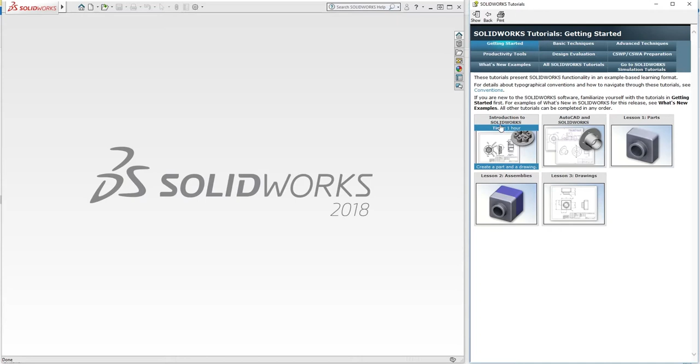Please click on the Home tab and click on Welcome to Solidworks. You can find the Learn tab over here, and there are a lot of introductions, tutorials and guidance. Please click on tutorial and you will find the first tutorial about the introduction to SolidWorks over here. That's what we are going to do in this video tutorial.

If you click on it, you will find the instructions step by step very clearly over here. And if you move your mouse over an icon and click on it, it will show where the icon is, so you don't have to find them. The instruction is very clear. Please follow until the end to draw the pressure plate.

Now let's do it step by step. In the first step, please click on Create a new part. In the Feature tab, click on Extruded Base and select the top plane to draw on it.

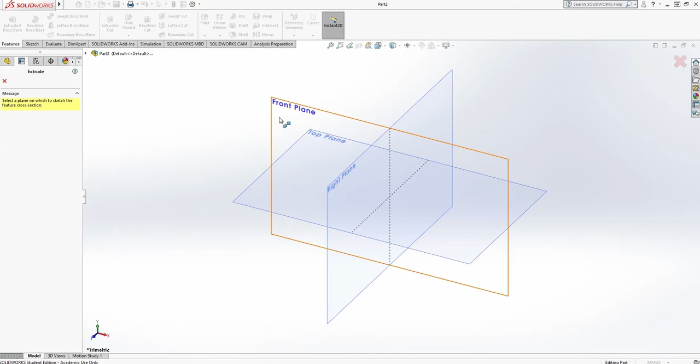When you are in top plane, click on Circle to draw a circle from the origin, and set the dimensions of this circle to be 128 millimeters. You can change the unit by clicking on Option, then Document Properties, then Units.

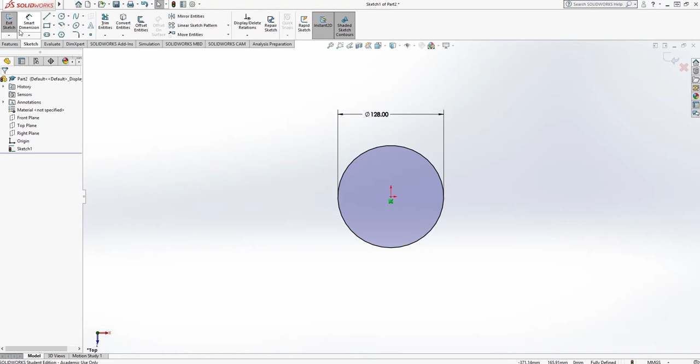After finishing, click the green tick and exit the sketch. Now you can enter the height of your base. You also can change the direction that you want to extrude. Please select the direction that goes upward.

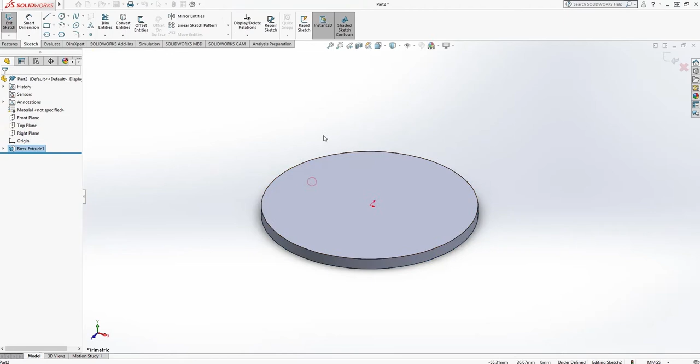In the next step, we are going to extrude a wall on the top surface. So change the view to the top view, and in the extrude base, draw a circle. Please set the circle dimension to be 75 millimeters.

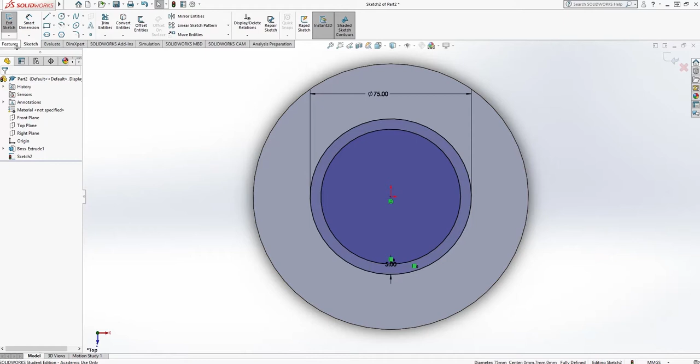In the next step, we are going to offset it. Click Offset Entities and select the direction to be inward, and enter the offset distance should be 5 millimeters. When you exit the sketch, you can enter the height of the wall you just drew.

To have a better perspective, you can change the view to be isometric.

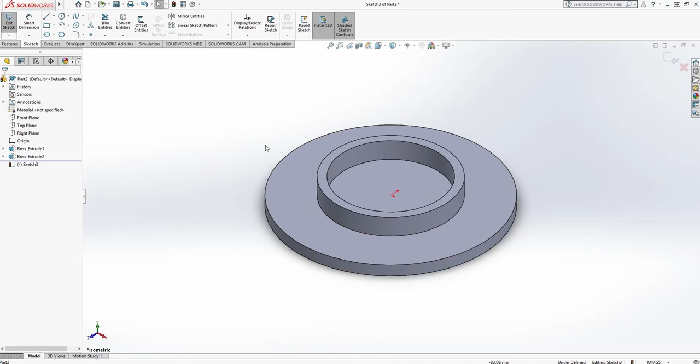In the next step, we are going to create a hole at the middle of the base. So we use Extruded Cut and click on the top surface of the base, and draw a circle at the middle. Please set the dimension of the circle to be 25.

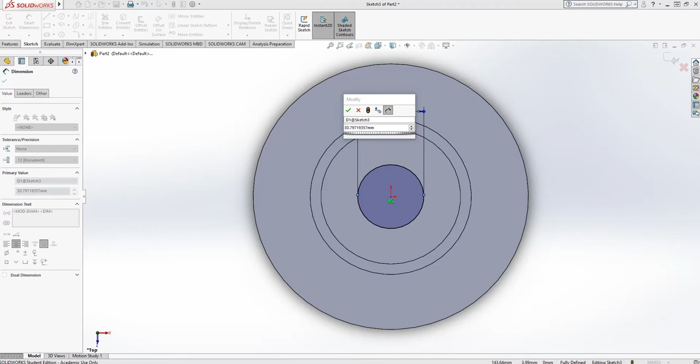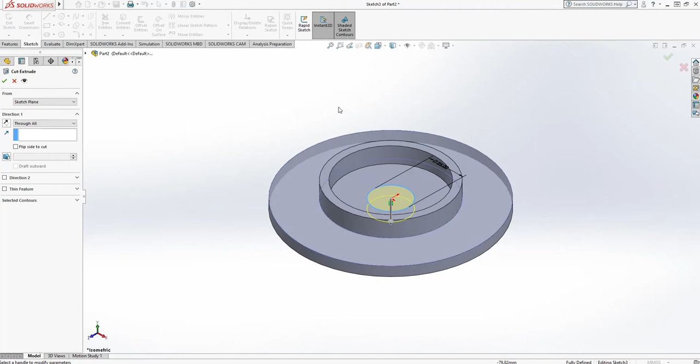When you exit the sketch, you can select to cut through all, that means you cut through everything. Approve it. Now we are going to do the fillet to smooth the edge.

Enter the fillet radius to be 2 millimeters, and approve it.

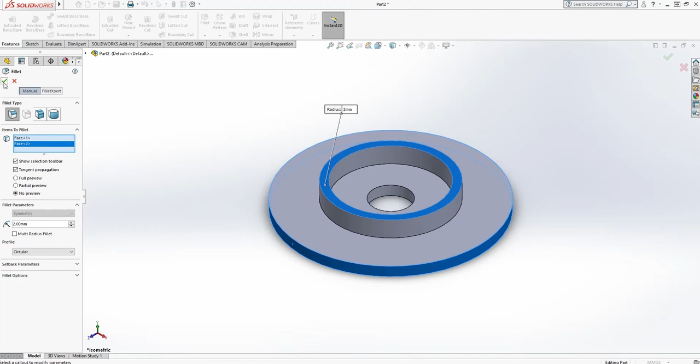Now we are going to draw a center line from the origin, and please remember to draw it vertically.

At the end of the center line, we are going to draw a circle to extrude it, and set the dimension of the circle to be 27 mm. The length of the center line should be 35.

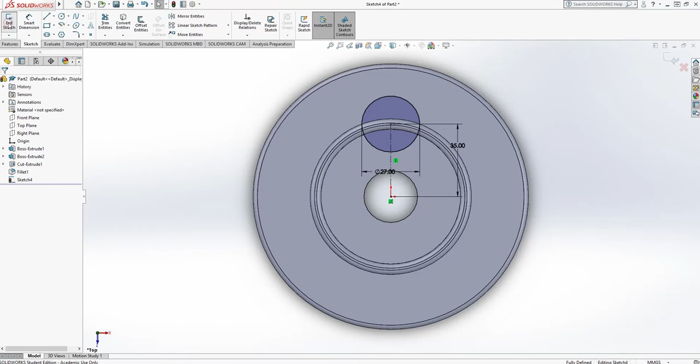When you exit the sketch, if you clicked on the extruded boss before, you are able to enter the height of the cylinder, which should be about 30 millimeters. To have a better perspective, you can change back to isometric.

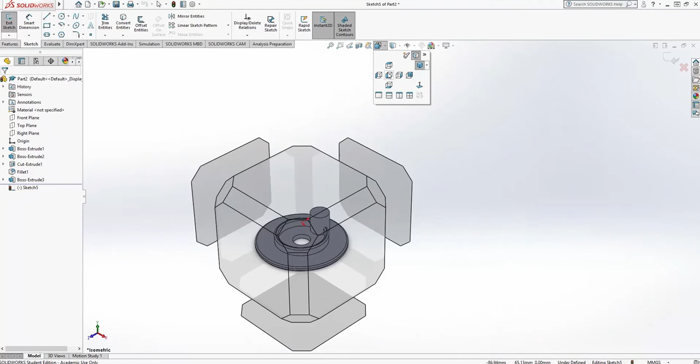In the next step, we are going to draw a hole at the top surface of the cylinder. Please use extruded cut and click on the top surface. You can change the view to the top view to have a better perspective, and draw a circle from the center. You can change the dimension to be 15 millimeters.

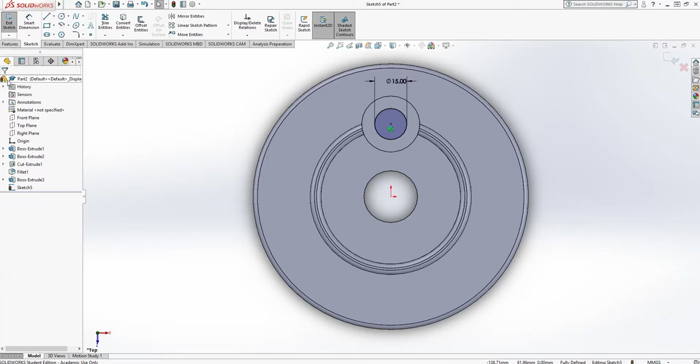When you exit the sketch, you can select Through All, and you can change the perspective to be isometric to have a better view, and approve it.

Now we can change the shading to see the hidden line to smooth some edge inside the cylinder.

Click on Fillet and click on 4 entities indicated by the instructions, and enter the radius as 2 millimeters.

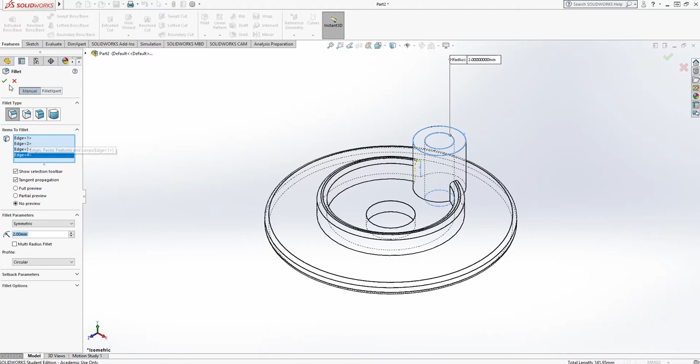Now we can change the shading back to color. In the next step, we are going to make 6 replicates of these cylinders.

To do that, we need to show the temporary axis by going to View, Hide and Show, and click on Temporary Axis. Now you can see the temporary axis.

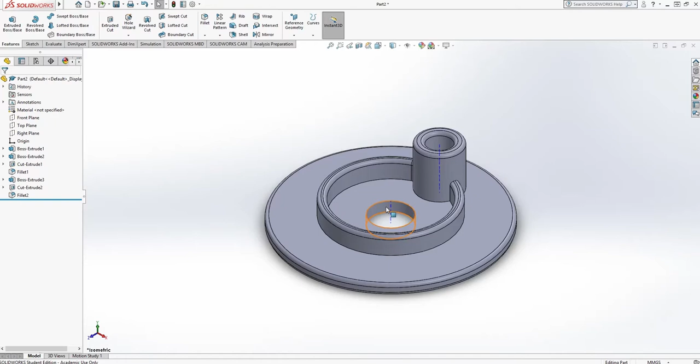Please select the circular pattern. In the first property, select the axis you want to rotate about. Select the first axis, select equal space, and enter the number of replicates, which is 6.

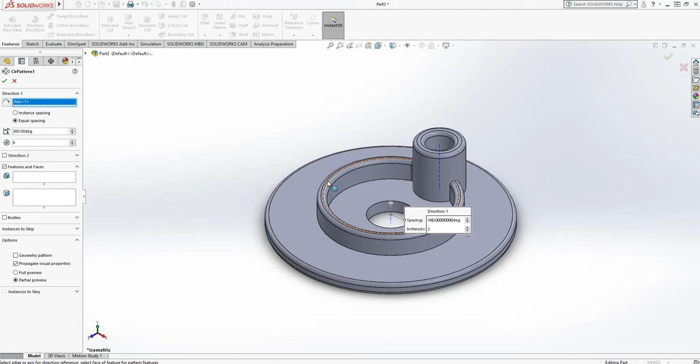In the second property, click on the object tree and select the entities you want to make the replicates, and then approve it.

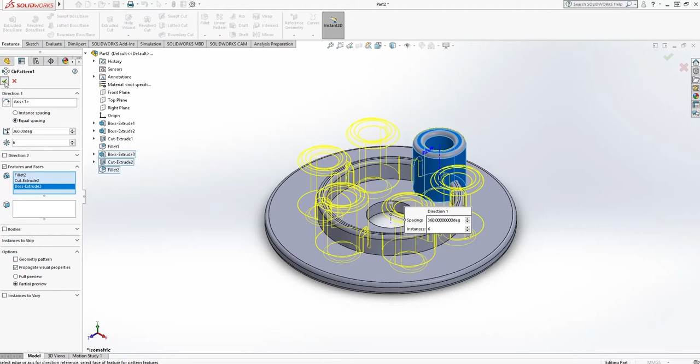After that, you can hide the temporary axis if you want to. In the next step, we are going to smooth some edges.

We click on Fillet and select the entities as indicated by the instructions. You can select All Pressure Plate if you want to.

Now it's time to create a new technical draft. First, please save your drawing because your software may crash sooner or later.

You can create it by clicking on Make Drawing from Part. However, when you do that, the default template will be used, and that may not be what you want.

So my suggestion is please close SolidWorks and reopen it.

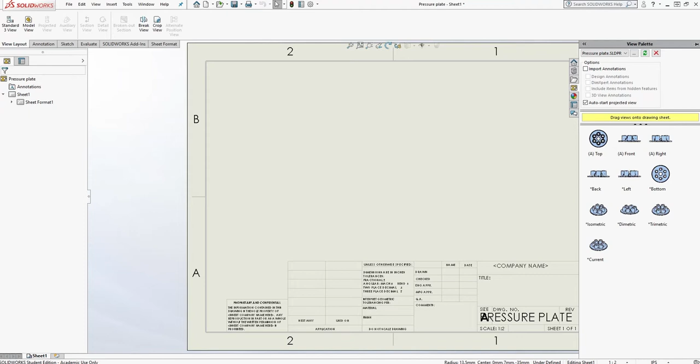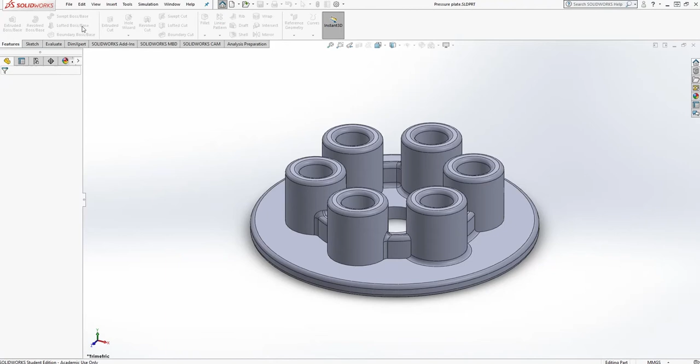You can select the part you just created, and then select File, and then Make Drawing from Part. Now you are able to select the template you want.

You can browse to have another template if you want to. And please remove the tangent edges.

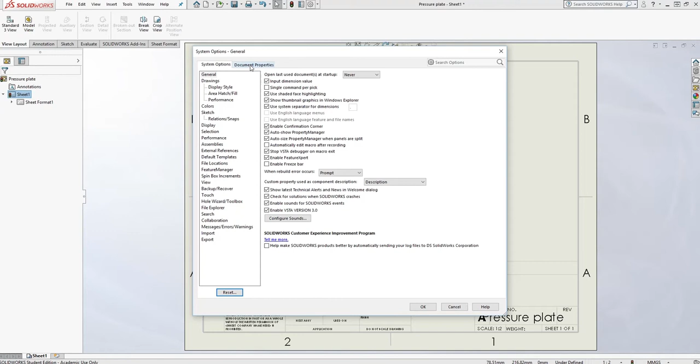Select Options, Document Properties, and Detailing to uncheck the center mark.

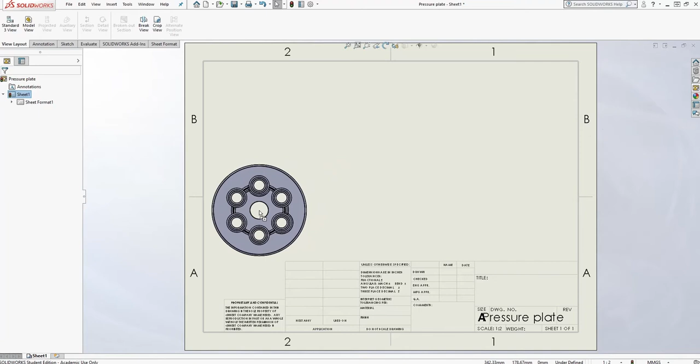Now you can drag the top view to your draft. You can create a section view, and you also have some option to have the rotated section view.

Just green tick it and drag it to the right hand. You may have to flip the direction to have a logical view from the left hand side to the right hand side.

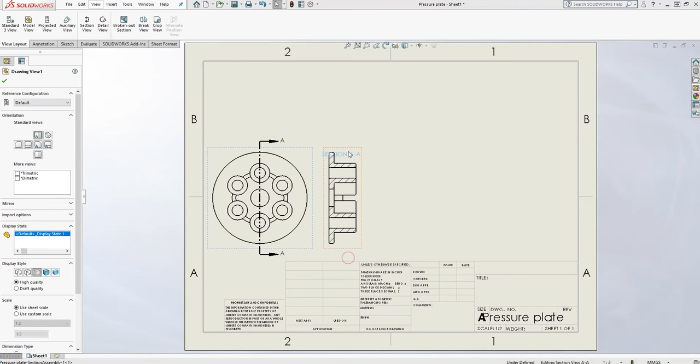You also can change the annotations and create a new detail view by circling the detail you want to have a close look at.

And please relocate your annotation so it will not make a mess with the title block.

You can save it because your software may crash sooner or later.

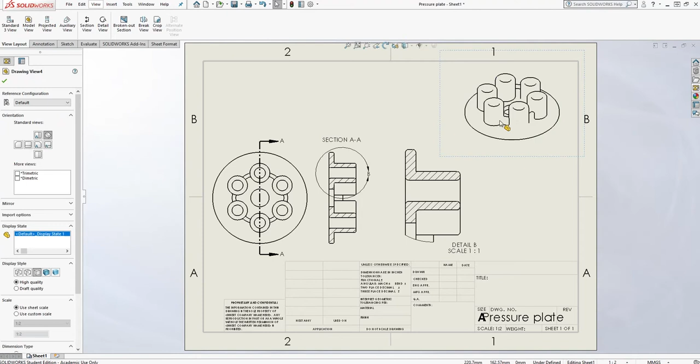The last part to drag in is the 3D view. So just drag it in and change the shading to have a better view of your details.

Now you can mark up the center marks for all of the holes you have, as well as the center line for all of the holes on the section view and detail views.

After I have finished it, it's time to make the dimensions. Please ensure that the units are correct before you put the dimension on.

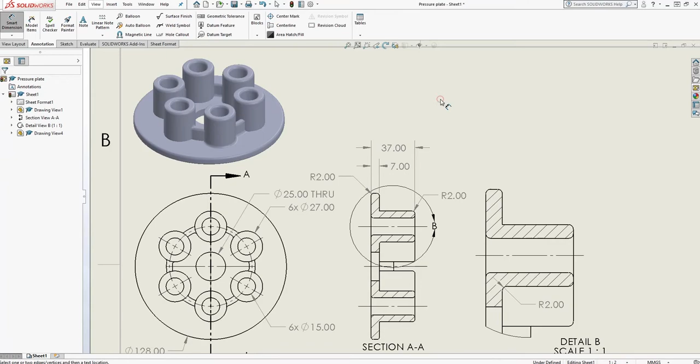The last step is changing the default information in the default template to your information.

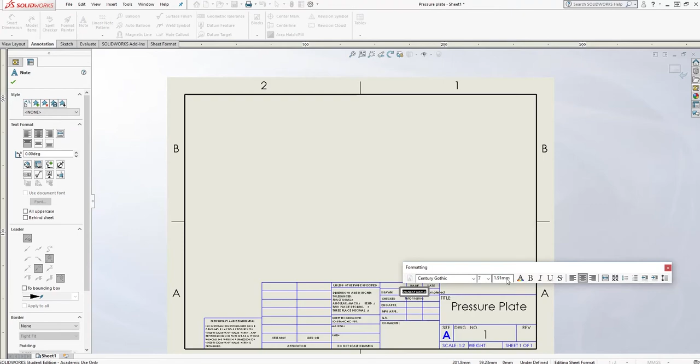If you do not have enough space, please do not reduce the font size. It makes the drawing very difficult to read. Check your abbreviations.

And then after that, you can save as or print as a PDF file.